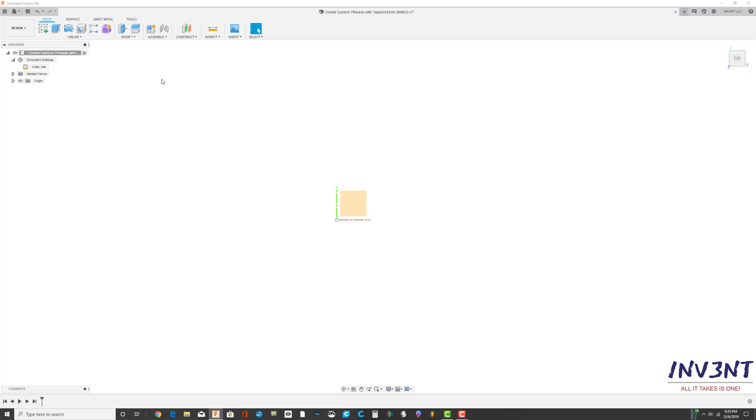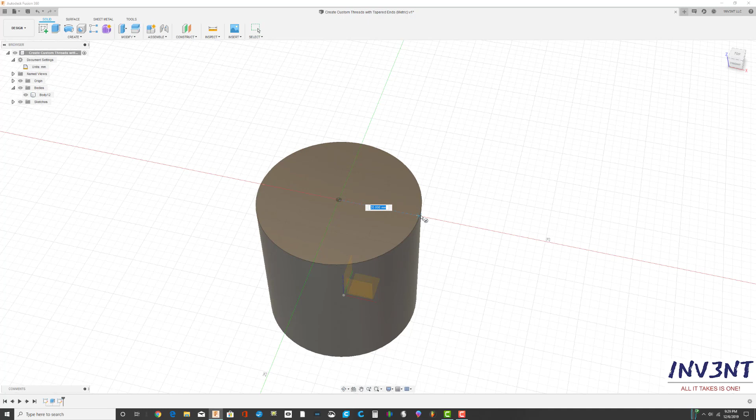We've got to create a sketch. I always work in millimeters, so we're going to make a circle that's 20 millimeters, and then extrude that 20 millimeters up, so we have a cylinder. Then we're going to take a coil from the middle and go to 23. That should hug it just perfect.

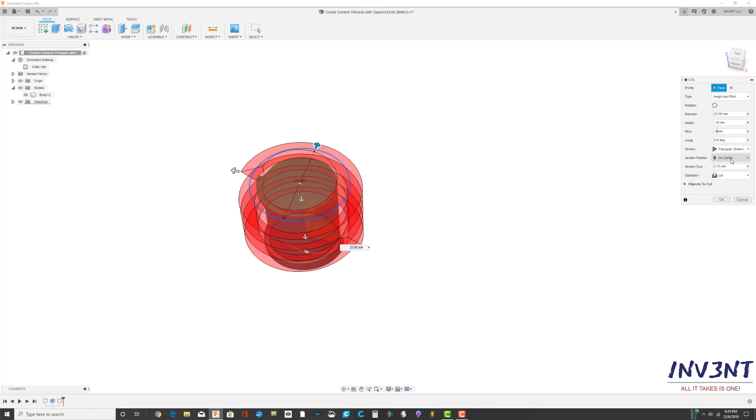We want to make sure on the coil options the type is height and pitch. The diameter is 23 like I said, the height is -18, and the pitch is -4. We want to make sure the section is triangular external, the section position is on center, and the section size is around 3. I like to bring it to the front to make sure everything's good.

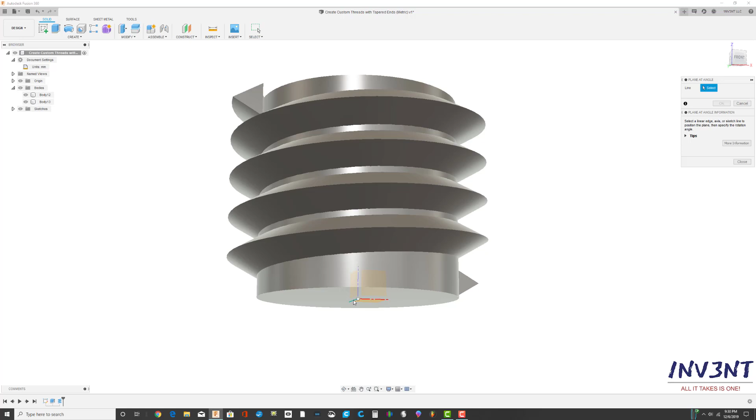Instead of join, we're going to create a new body because we need to mess with these threads without it being attached. So then we're going to go to construct, plane at an angle, go to the origin on the y-axis, click that, go back to the front.

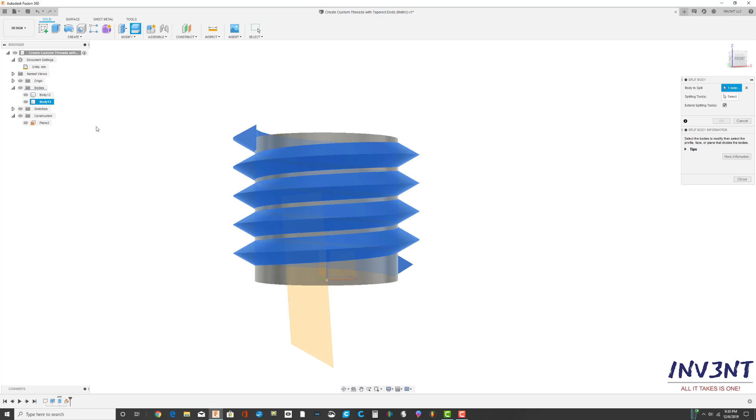We're going to tilt it up 90 degrees. So 90 minus 4 is 86. We're going to take our split body tool and make sure that is hidden so we don't cut it too, and then split the tool with the angle there.

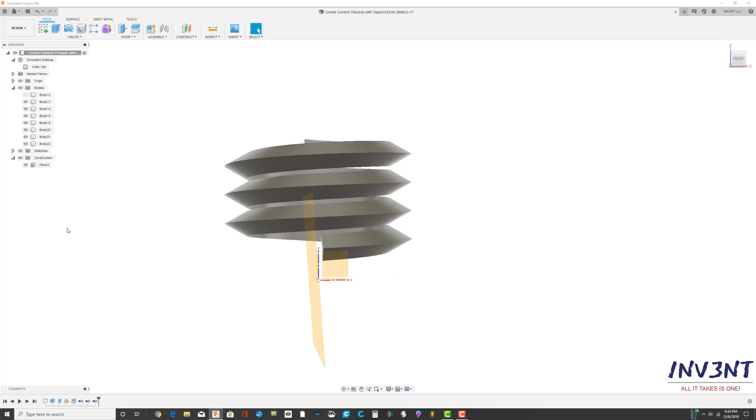We're going to take out a few of these sections, so it's 16, 17, and 19. We're going to just remove them, then combine to make it one part again, and show the cylinder again. I usually like to take that other plane out.

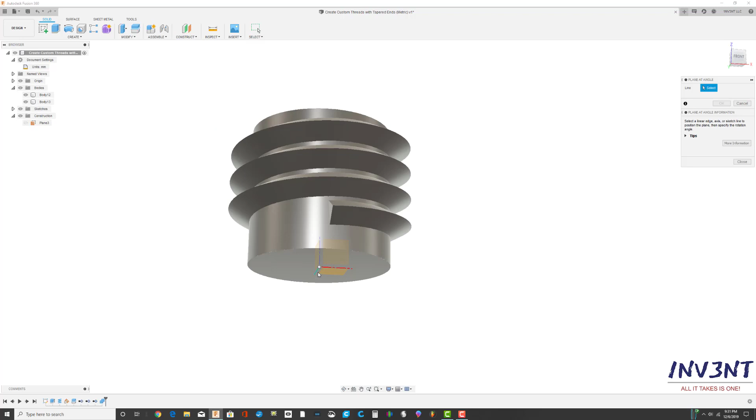Now we're going to construct, plane at an angle, go back to the y-axis of the origin again, and now we're going to do -4 on the angle. Just right click, create sketch.

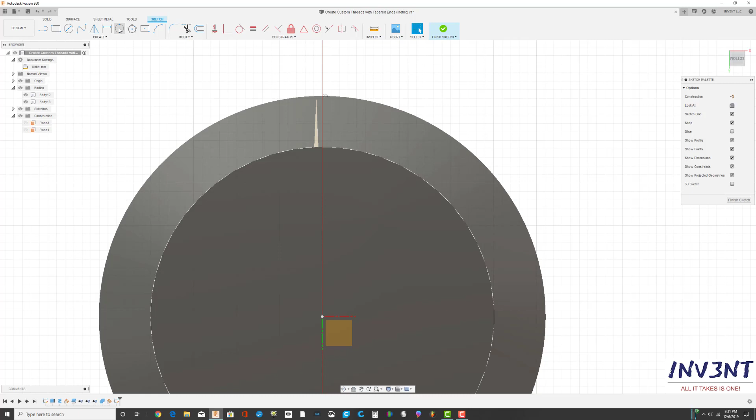We want to line this up so that we can start a 2-point circle right at this edge. It doesn't have to be perfect. We also want to be inside of this circle right here - you don't want to be on the outside, just inside. You can make it any size you want here; I prefer to have it a little bit bigger. So that's good right there, it doesn't have to be perfect.

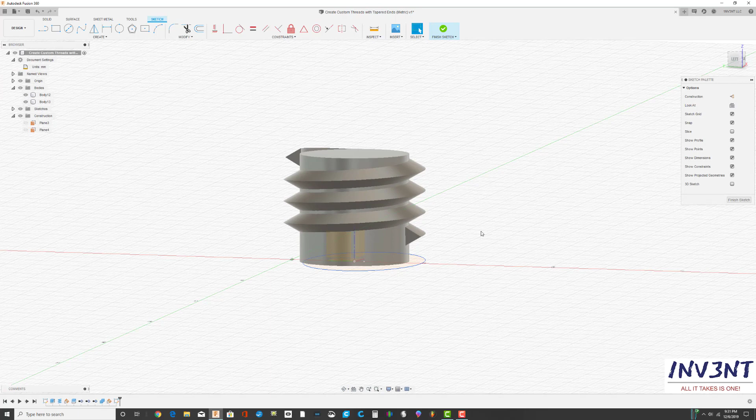Then what we need to do now is go to solid, select sweep, and the path of the sweep is going to be right here, the sketch. Then we want to hit join, and that is the finished thread.

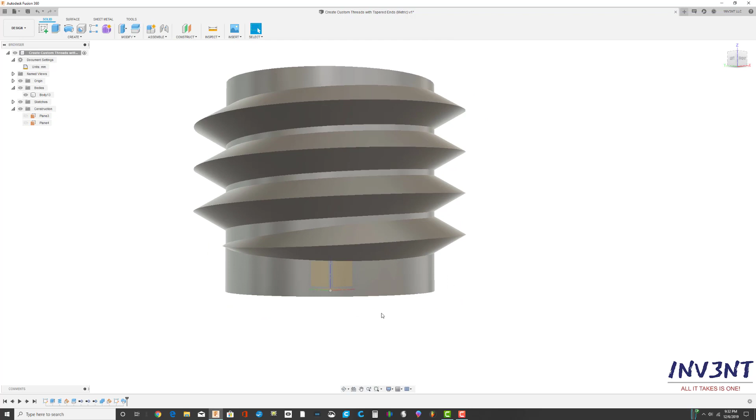It doesn't have to be absolutely perfect, but you can get it perfect if you want to slice it right on the middle line of the thread. But that is it.